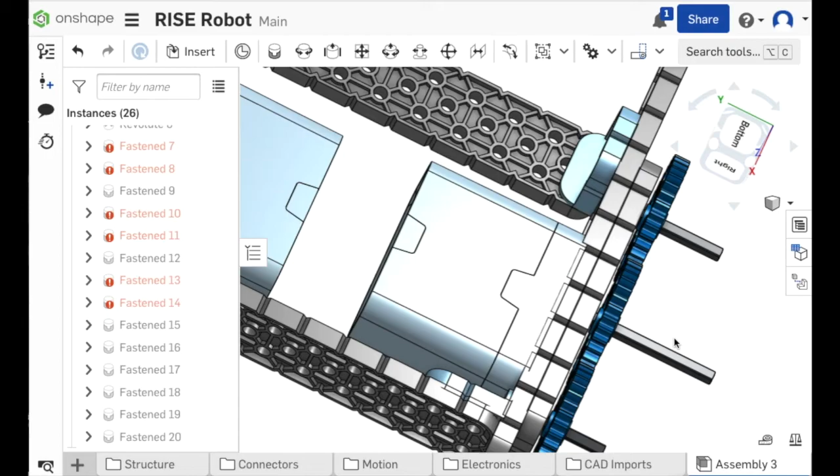Now that we have all of our gears fastened onto the pitch shafts, you can see when I turn it, all the gears are lined up so that the teeth are meshing or touching. So when one gear spins, the other gear spins.

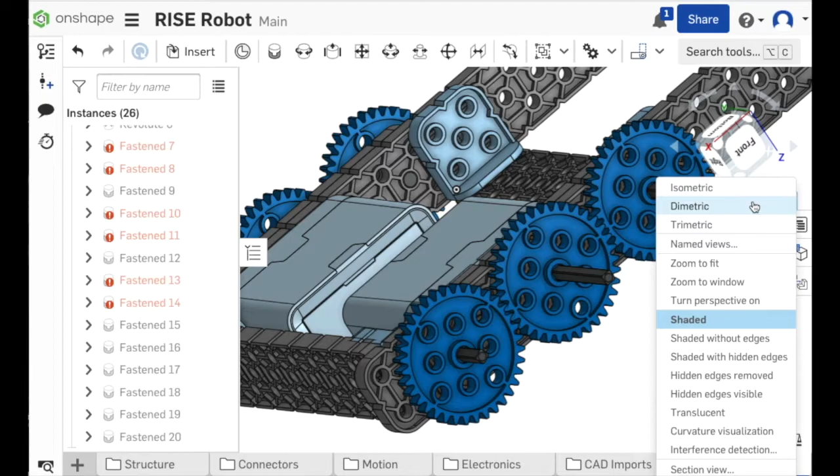Okay, we're ready to put the wheels on. So the last step here is to add 4 wheels onto our chassis and we are done. I'm going to go back to my isometric view because it's actually upside down right now. We're going to add a wheel onto this axle, this one, and this one. After you put the wheels on, the only last thing you have to do is add a rubber shaft collar that holds everything in place, and we will be finished.

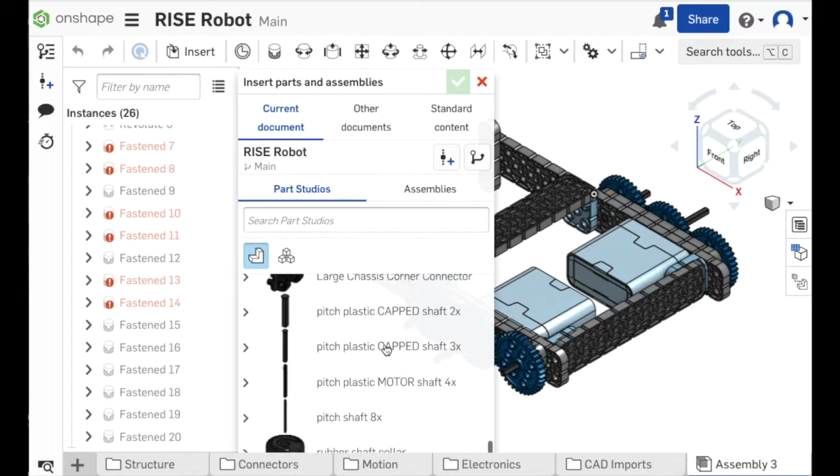So let's go ahead and insert, and there's 2 parts that you're going to insert, and we actually have to fasten them together. One is going to be the rubber tire. Let's place that in.

The next thing we're looking for is this wheel hub. Let's see if we can find it in here. It starts with a W. I think possibly my menu is too long for my screen, so I actually have to make my screen bigger. You can't see what I'm doing, it's off my screencast area, but you should be able to get to yours. I'm going to add the wheel hub. Let me bring my screen back up.

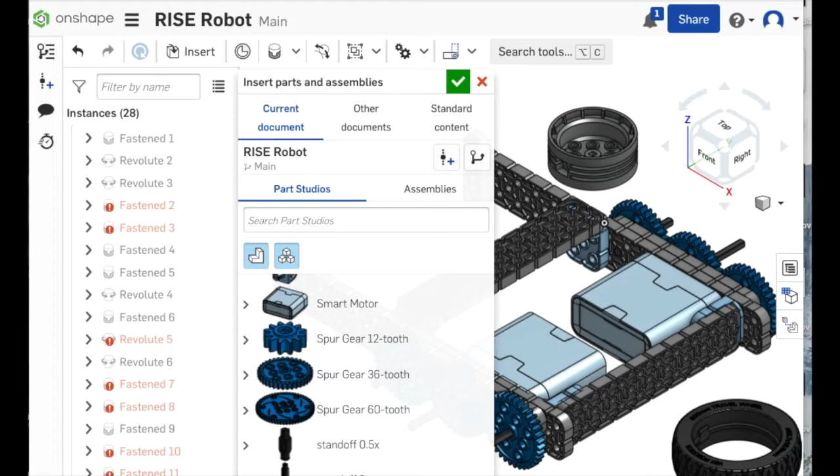So now that I have inserted the wheel hub and the rubber tire, I'm going to fasten these 2 before I put it onto this pitch shaft. Let me go ahead and check mark to accept.

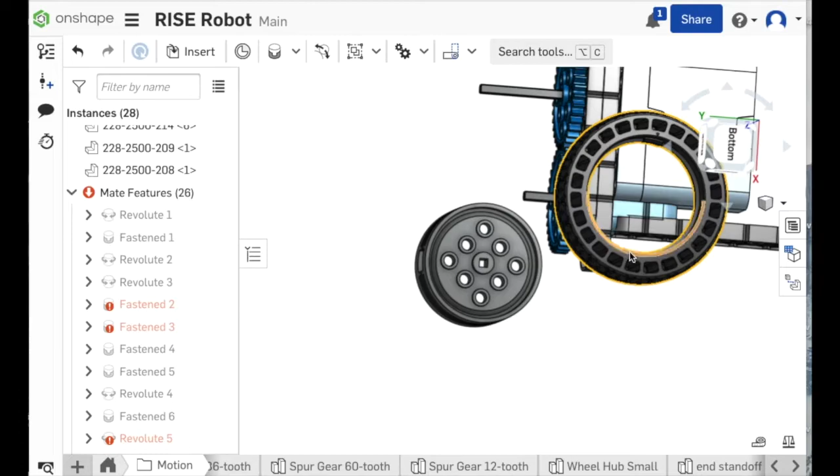So I rotate this around, and I'm going to try and mate this outer rim of the wheel hub to the inside rim right there of the wheel. Let's see if this works. Let's do a fastened mate, and then I'm going to do the outside rim of the wheel hub to the inside of the rubber tire.

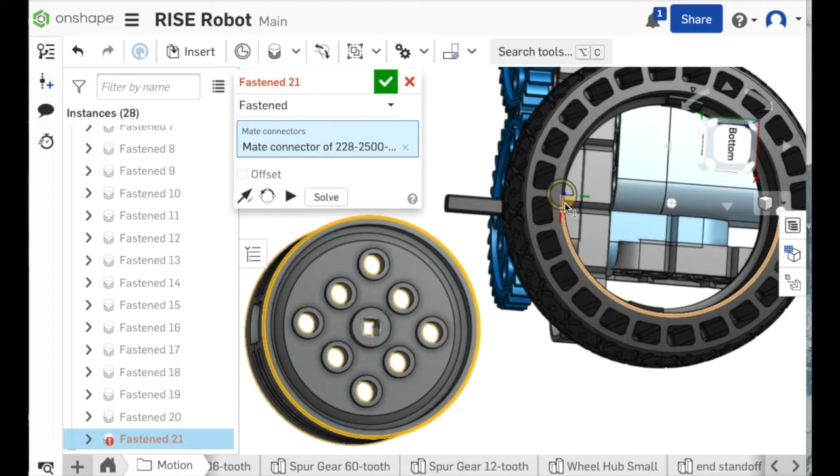Looks like I'm getting pieces behind it highlighted. Let's see if that works. Does that work? Maybe. I might have to scoot it over a little bit and it might work. There's probably a few ways to do this so you can experiment. Let me go ahead and open that fastened mate and see if I can move it a little bit.

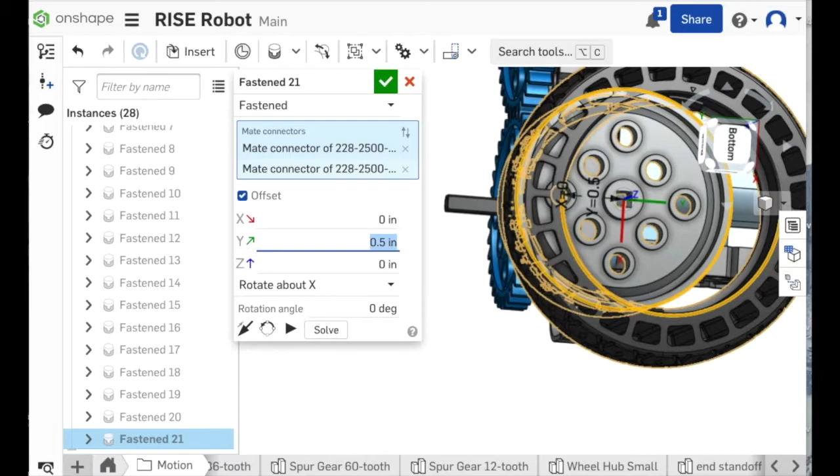Let's offset it. It looks like it might even be on the Y. Let's see, 0.5 - it is the Y. Okay, it needs to go a little bit more. Let's try just 1 inch. All right, let's see what that looks like. Probably not the best way to do it.

You might find a better way. Looks like I'm pretty close, but I'm going to need to offset it a little bit less. Let me open up that fastener mate. I'm gonna try just 0.8, see what that looks like. Oh no, 0.9 maybe.

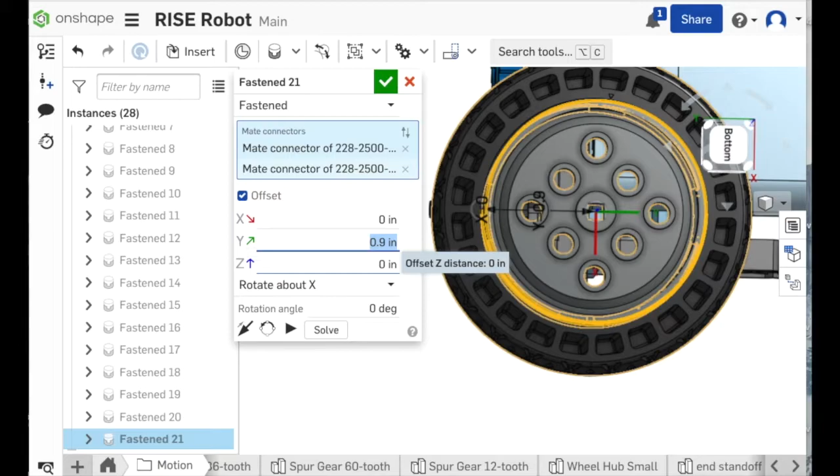I'm gonna try a different way on the next wheel, but at least it looks like it's kind of there. Check mark to accept - it looks like we have a wheel. So the wheel hub goes inside of the rubber tire. Now notice that there is a square hole right here, and you guessed it, it's going to go on the pitch shaft right here. So let's try and do that.

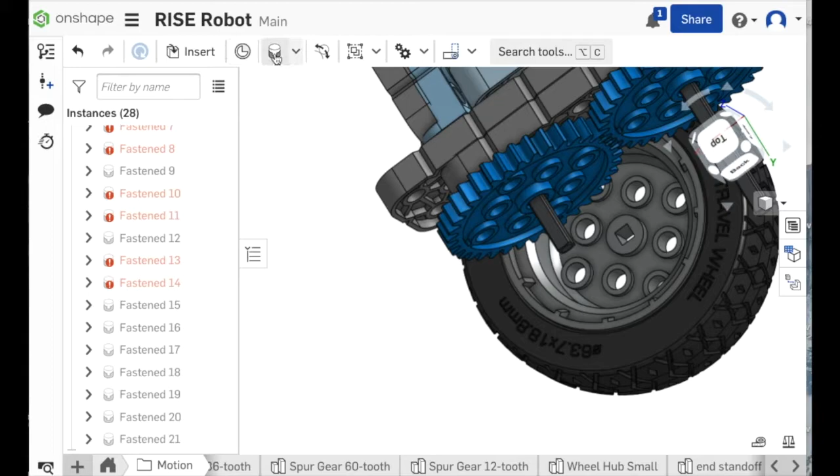I'm going to do a fastener mate. I'm going to pick the end of the axle right here, and then zoom out a little bit. Come over to the wheel hub. I'm going to do the back side of the tire. Let's try this square hole if we can get it right there. See what that looks like. Check mark to solve or accept.

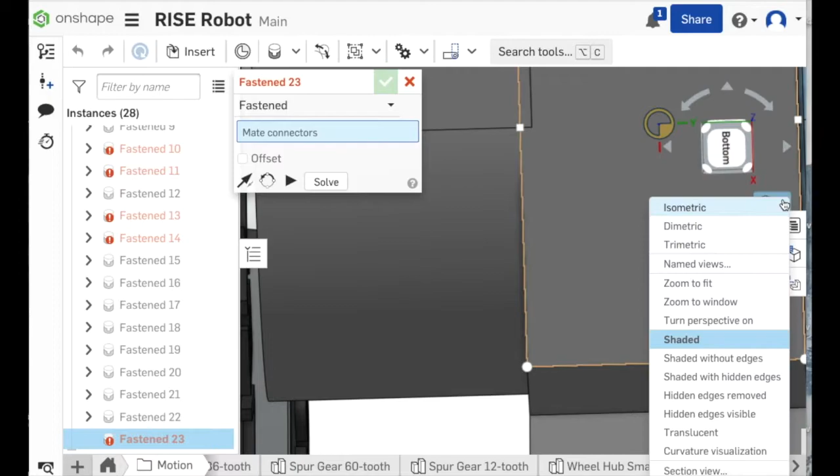Let me go to the isometric view. I can't see a thing. Looks pretty good. My wheel's actually backwards, but let's try and flip it and see what happens.

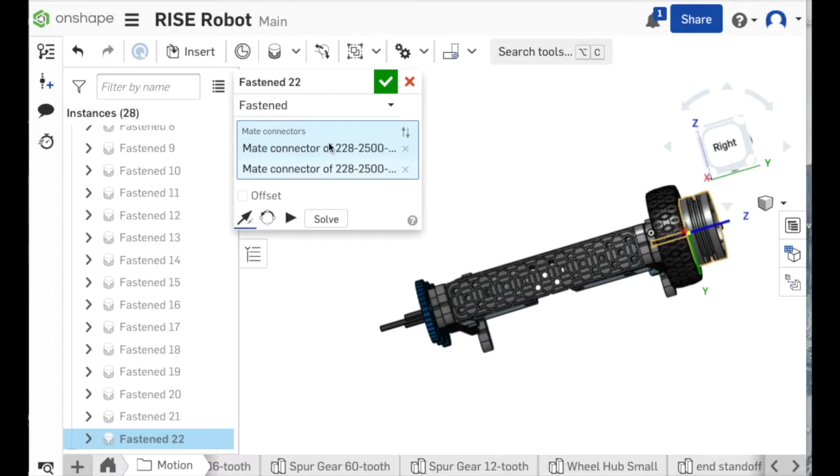Let me close out that fastener window and open the one we just did. Let's see what happens if I flip the axes. Now remember, the rubber tire will move with it once I hit the check mark. That looks better, because now this indentation should be going this way - that's the right way to put the wheel on. So now let's offset it to get it onto that pitch shaft.

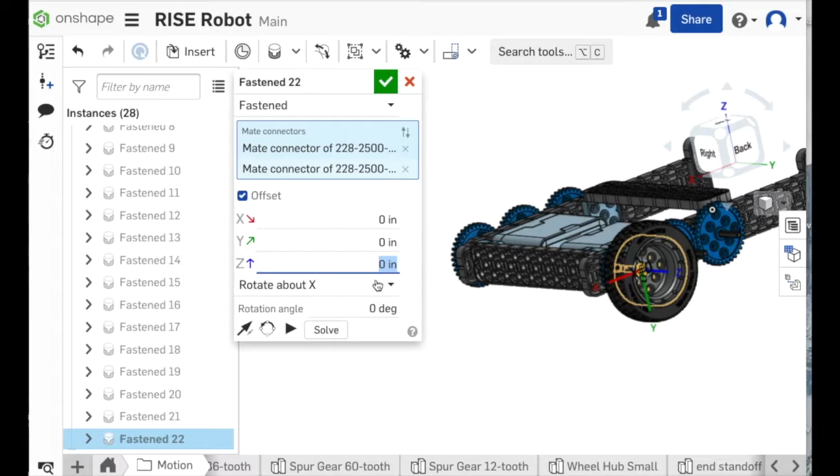I'm going to offset it. Looks like it's going on the Z again because it's on that axle. Let's try 0.1 and see which direction it goes. Good, that's the right direction. Okay, let's try 0.5. Check mark to accept, and let's see, can I see the gear?

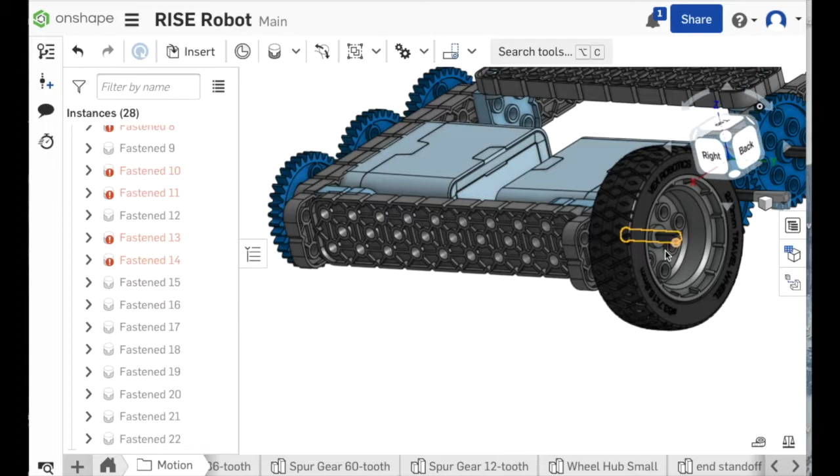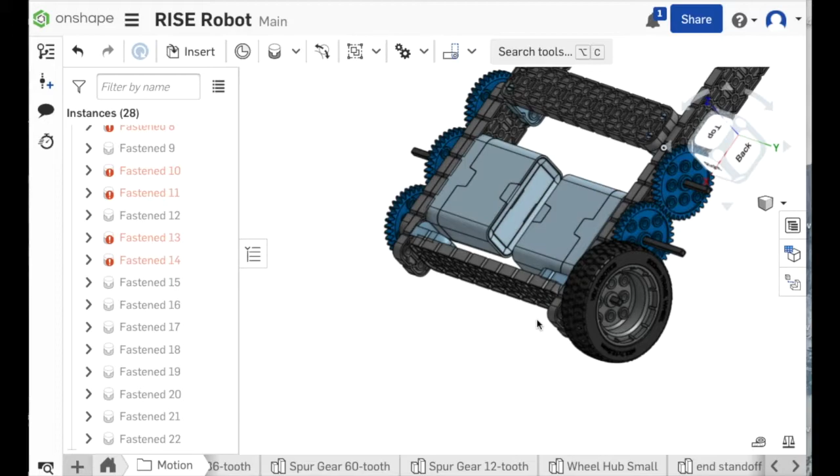Now, to finish this off, we're going to do 3 more tires like I just showed you. And we're also going to add something called a rubber shaft collar. I'm going to insert it, and the rubber shaft collar looks similar to a tire, but it's much smaller. Let me place it in there. It just goes on this axle to hold the wheel in place. You also put one on the end of this axle and a wheel, one on the end of this axle.

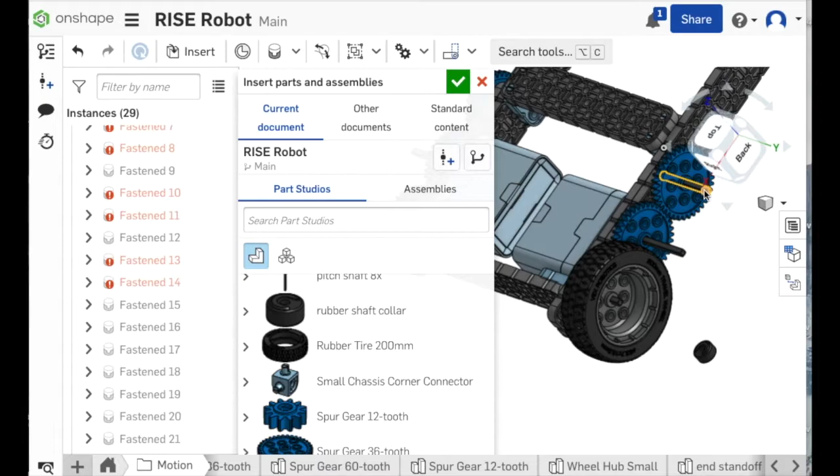Let me show you how to do this, and I think you're pretty much good to finish this off on your own. I will go through the steps, but I'll fast forward so you can see how we do this. So, fasten mate—let me go to it, it's kind of hard to see the center of the rubber shaft collar, let me zoom in. We used one of these in our constraints lesson.

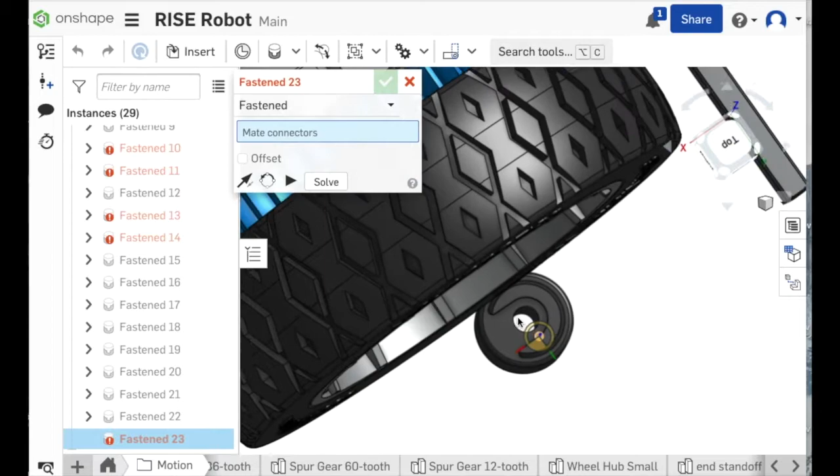Okay, right there, the center of the shaft collar, and I'm going to put it on the center of this axle. And this one can actually just be on the end, just like that. As long as it could probably push it in a little bit, but you get the idea. So let me close this out, open it up, and offset it just a slight bit.

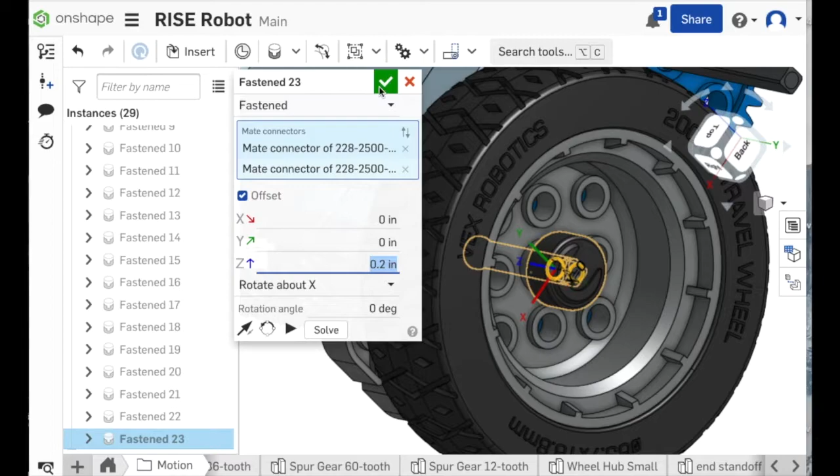I did 0.2 and it looks great. So that is what it looks like in real life: you have a shaft collar on the end of the axle holding this wheel on. So I'm going to go back to the isometric view.

You're going to repeat those steps to put 3 more wheels on. So you're going to bring in the wheel hub and the rubber tire, fasten them together, and then add them to this axle, and this axle. And then let's finish everything off with rubber shaft collars, and you have finished the chassis. Congratulations. I'll go ahead and fast forward through my steps, but you are going to just try and figure this out as you put them on, and it's very exciting that you finished a whole subsystem of a robot. All right, here we go.

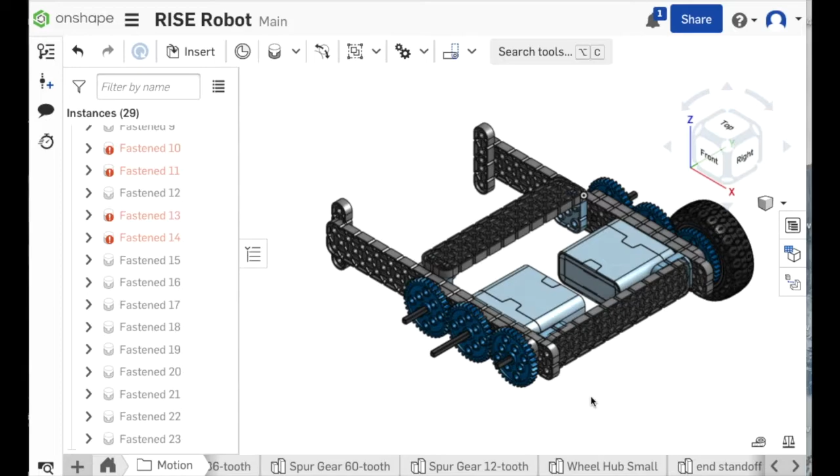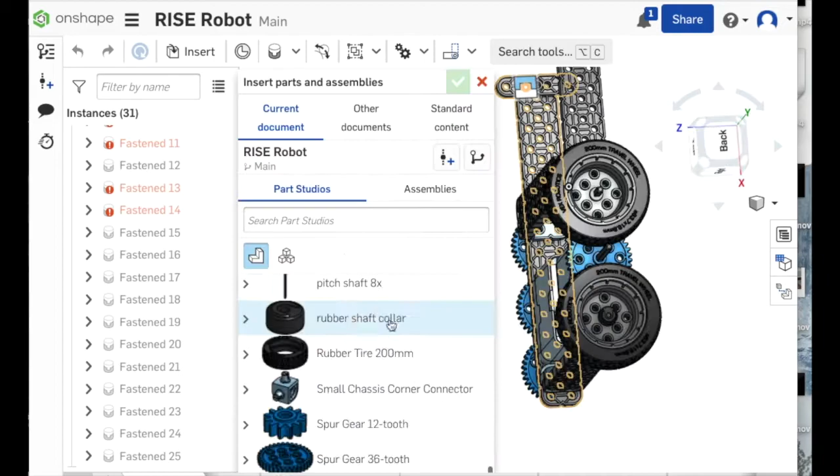So here I'm going to fast forward through adding one more wheel hub and rubber tire. I'm going to fasten them together, find that center point of the square hole, and find the center point of the pitch shaft, and then do some adjustments with the fastener mate, trying to offset it and get it in place so that it looks similar to the first wheel we put on.

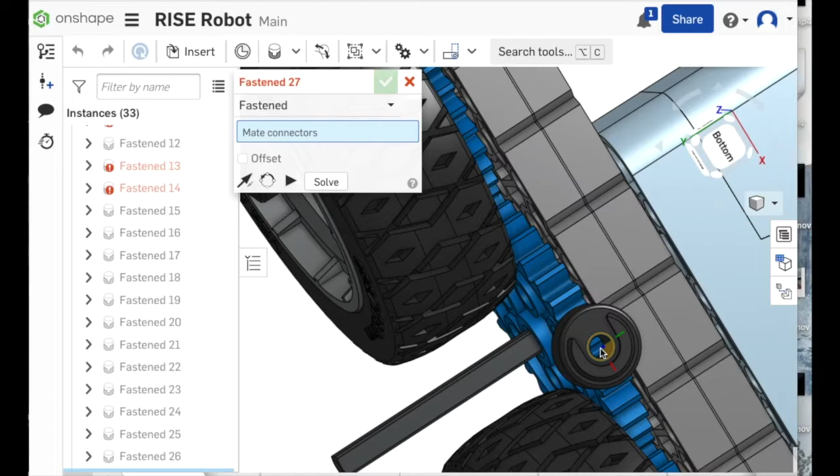Don't forget, I'm going to add an extra shaft collar into my workspace to add onto this axle right here. So let's go ahead and do a fastener mate and rotate it to get the center of that rubber shaft collar, and then add it onto this axle as well, right there, because we've got to keep that gear in place. All right, looks like the first one didn't actually get there. Let's go back to that shaft collar right there and check mark.

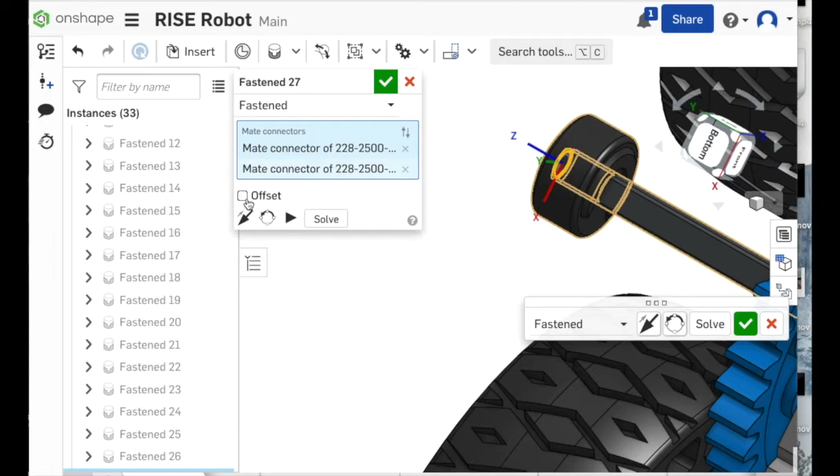I definitely need to offset it, so let me go ahead and bring it down quite a bit. I'm going to bring it down 1 inch, and that looks pretty good. See how it's right up against that gear? And check mark to accept.

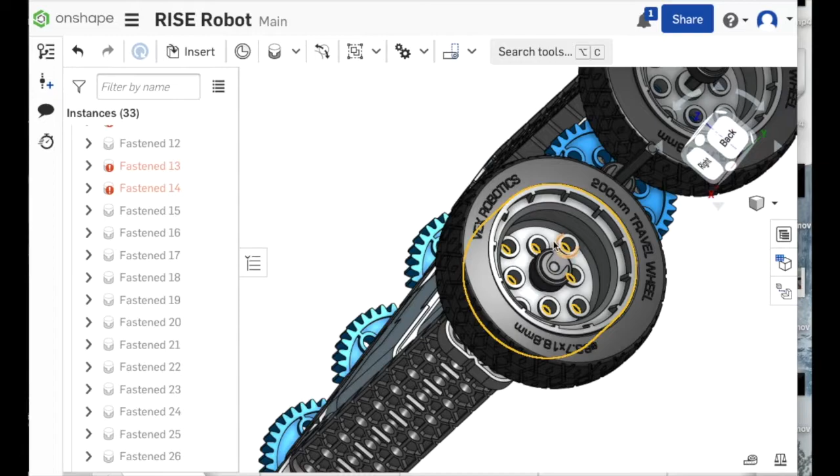Let me go back to the isometric view, and now you can see we've got 2 wheels held on by shaft collars right there, and a shaft collar holding on that gear right there. And that side is complete. Now you just have to repeat it on the left side, and you have finished the chassis of the RISE Robot. This is a complete subsystem as soon as you get the other 2 wheels on and rubber shaft collars. I think you know how to do that by now.